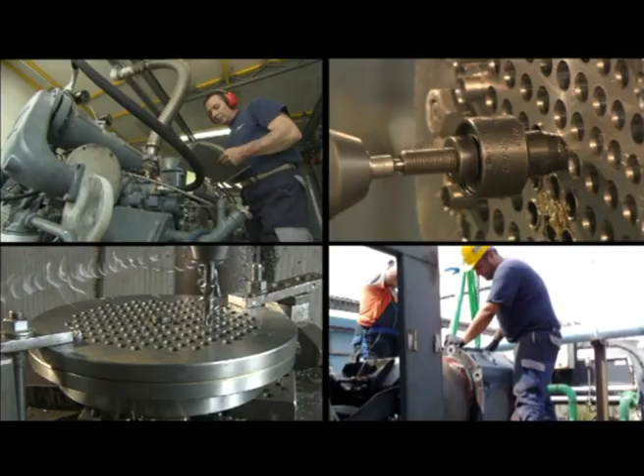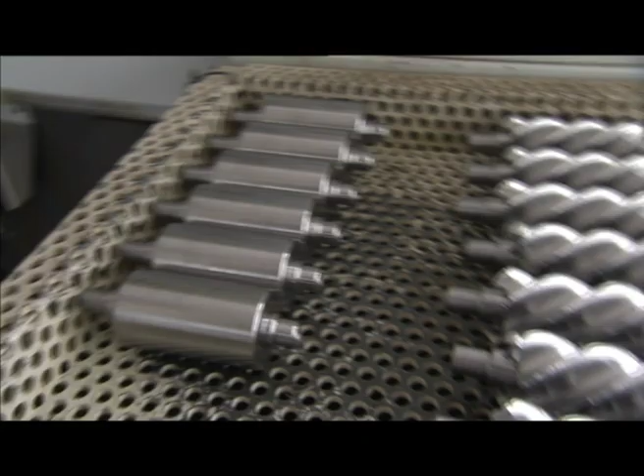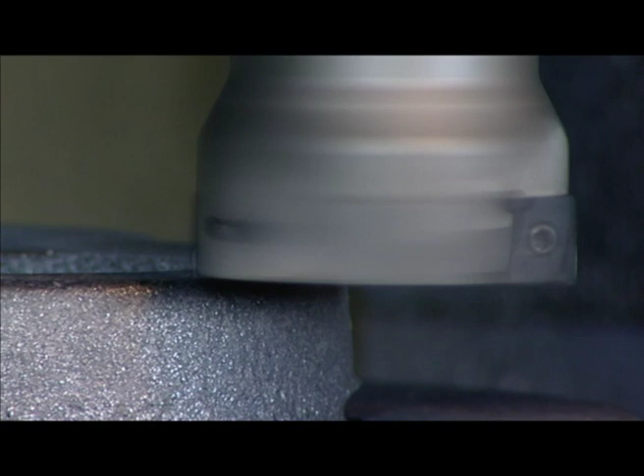Riem Service is the Italian company with the capability of realizing components for the production of air and gas compressors. For decades, the technologies have been developed by the consolidated Italian companies dedicated to this specific area. A real tradition is often handed down from generation to generation.

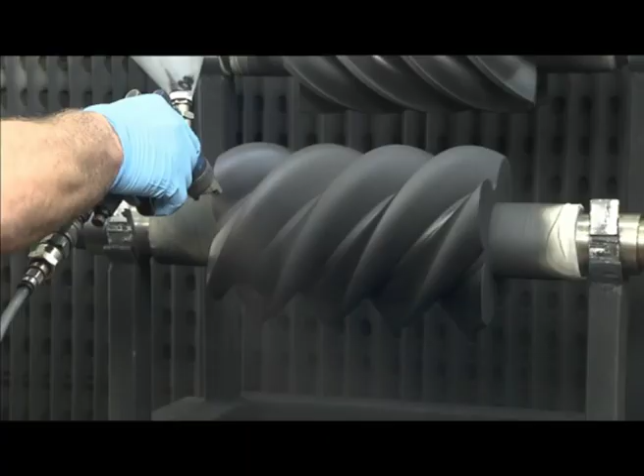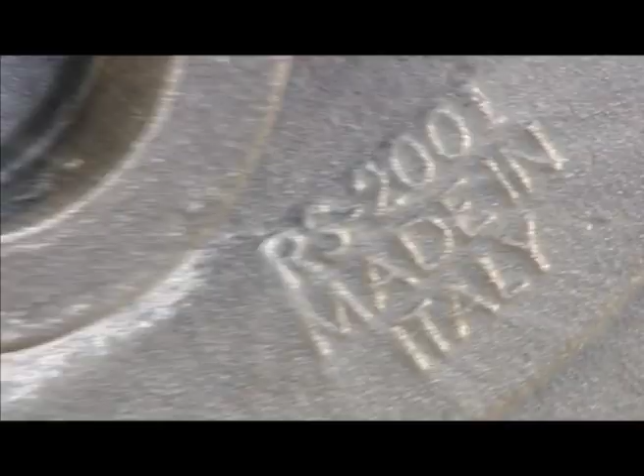Riem Service, after successfully obtaining the patent for the realization of the service aimed at recovering the functions of the oil-free air end, plugs into the dynamic interaction between tradition and development, designing and implementing the first series of oil-free pumping elements. It is all Italian, destined for the market of producing new machines and also the aftermarket.

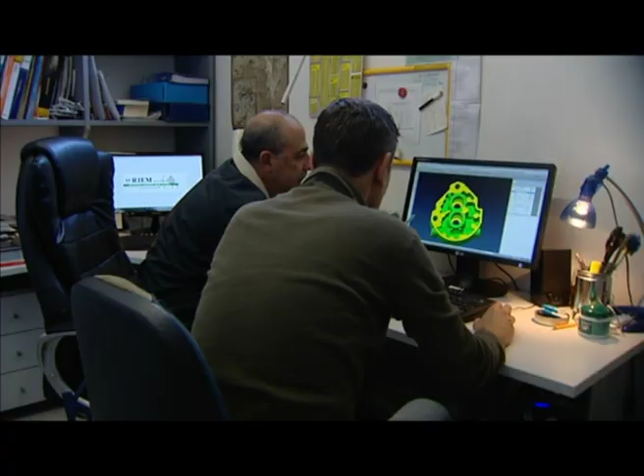A team composed of professional people, designers, molders and industry experts, specialized in manufacturing mechanical parts and programming of numerically controlled machines, have designed and realized our prototypes of the first oil-free air ends.

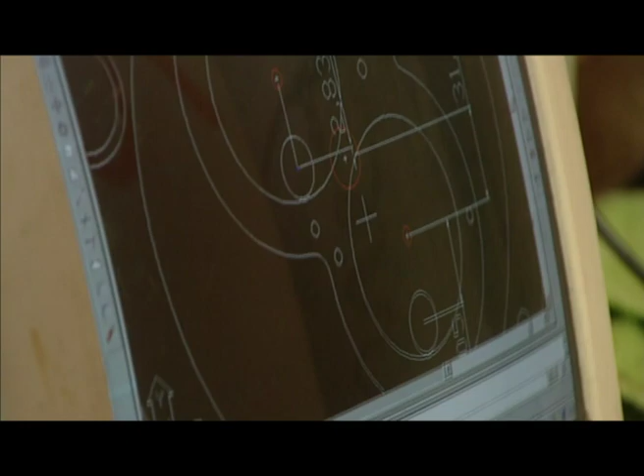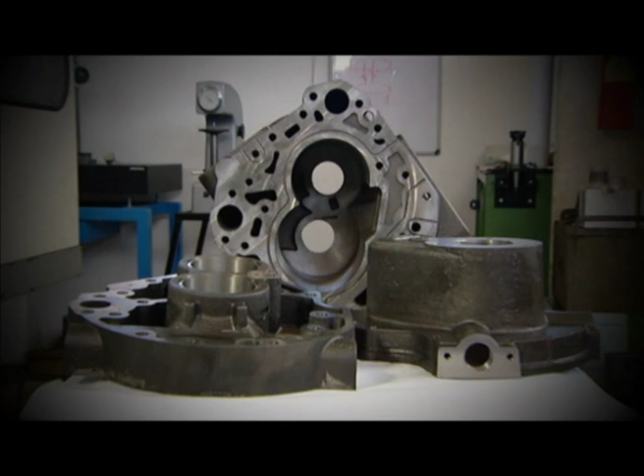The phases that led to the realization of the series of compression stages, now in production, pass through the analysis of the requirements of performance as demanded. The selection of materials, the dimensioning of parts, and the creation of the first samples were made using the most appropriate tools and engineering technologies.

Simulating, where necessary, the behavior of the materials under various working conditions for the selection of thickness and material characteristics. At the end, the analysis of the final projects provided the creation of molds for the production of cast iron.

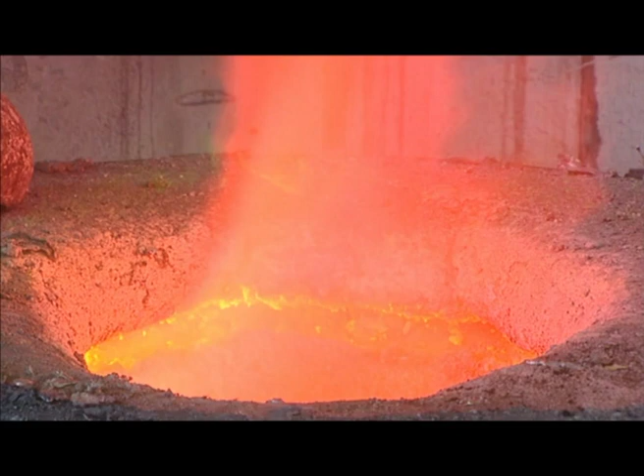At the phase of practical realization, as you can see, the process passes through steel mills and cast iron castings, certified and of high quality, producing the components for the engineering industry.

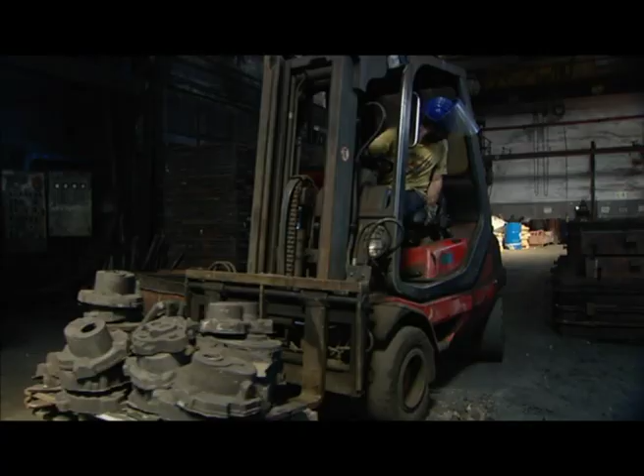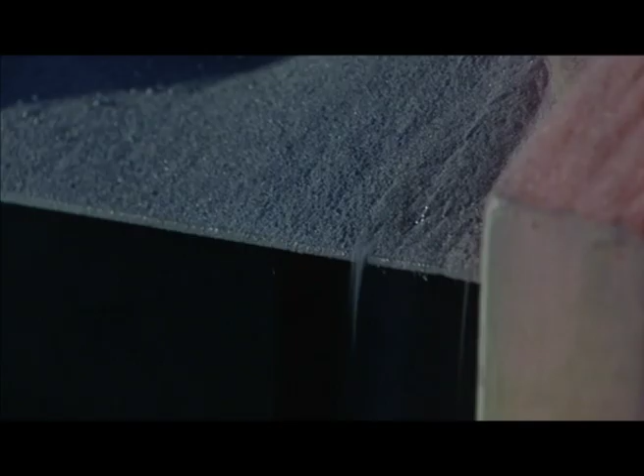After the casting process, each piece is freed from dross and smear through an additional step of sandblasting that prepares the components for the intermediate stages of the production process.

At our establishment in Rome, the fusions are now ready for the stages of roughing and finishing. First, however, they will be subjected to careful visual analysis to determine anomalies that, if highlighted, will lead to rejection of the defective part.

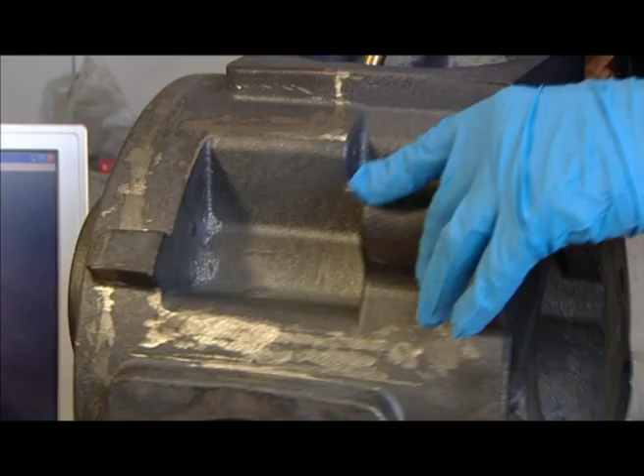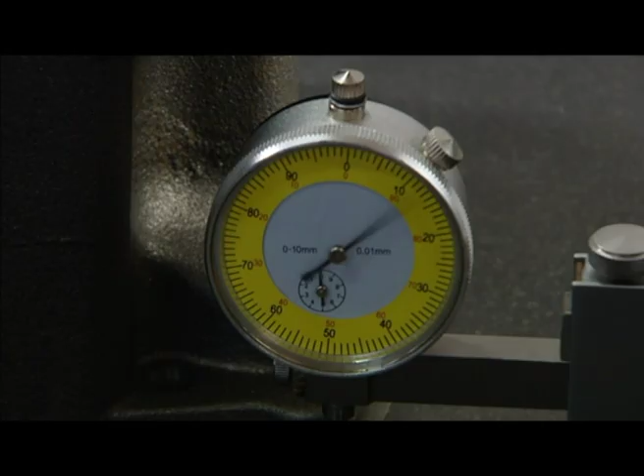Our numerically controlled machine tools, after the first phase of programming, accommodate fusions for finishing, which determines the final dimensions, tolerances, and specific processing.

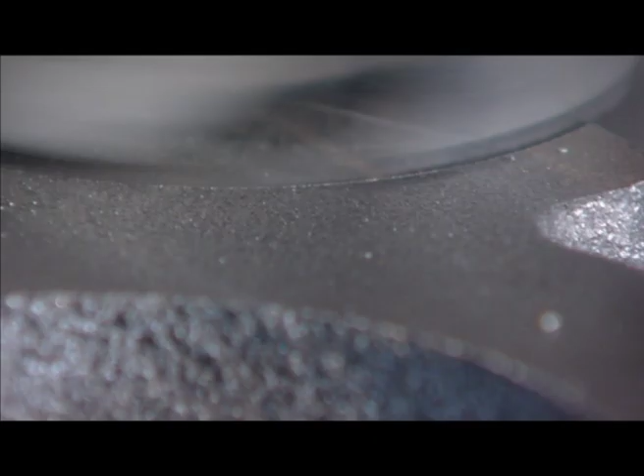The programming of the machines has been performed with highly restrictive tolerances to ensure maximum performance of the final product.

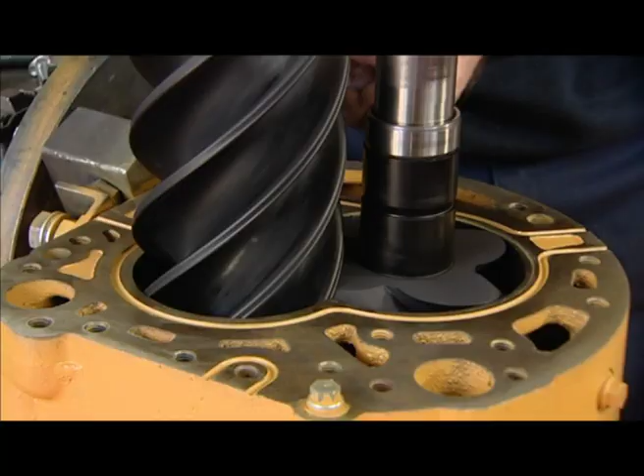At the end of quality control, it's ready for the actual installation of the pump, the application of coating on the components, and the assembly of the synchronism gears, as well as adequate high-speed bearings. This makes your air end a high-quality product.

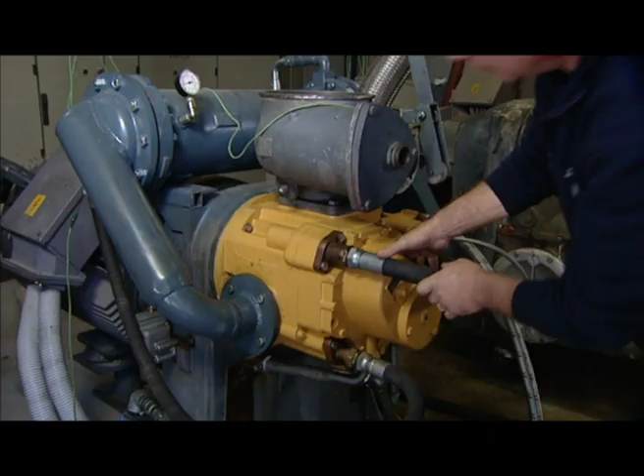Riem Service performs on each element produced an accurate trial test that determines the efficiency of the new pumps, guaranteeing performance in pressures, temperature, and volumes of air produced.

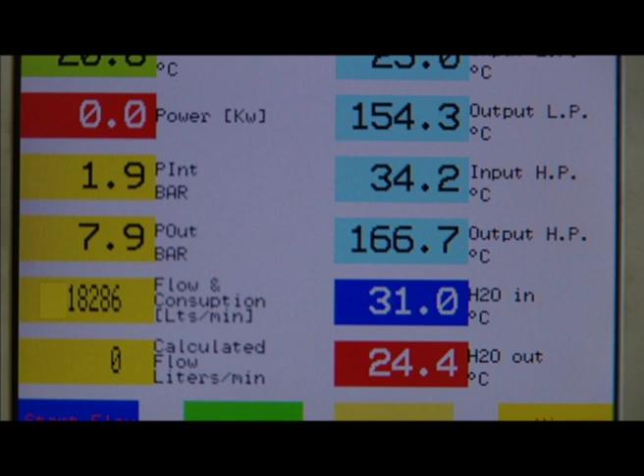Special sensors guarantee control of the quality of the compressed air produced, corresponding to that of the 0 class, respecting international ISO regulations.

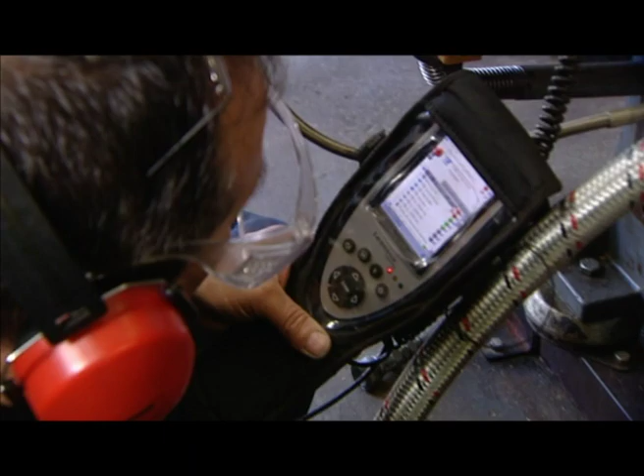Now your air end is ready for packaging and shipment. Every one of our products comes with a 12-month warranty.